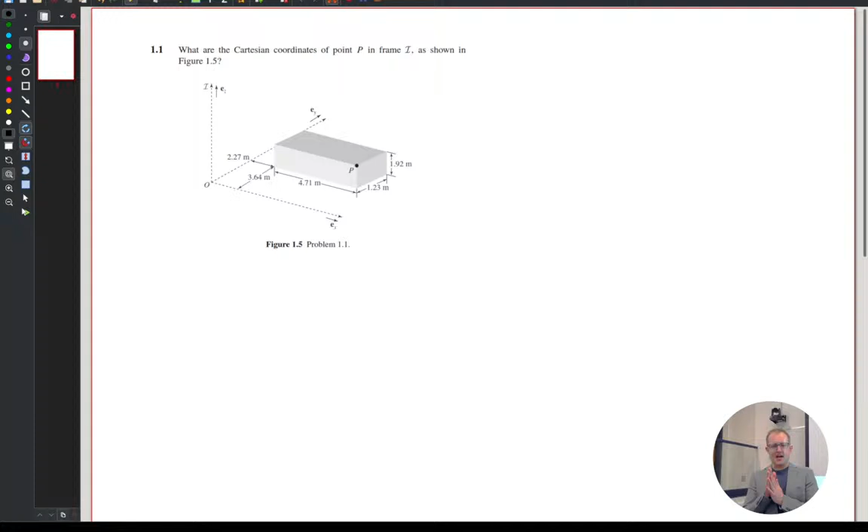All right, so we have this box, and then a reference frame, and we're trying to figure out where point P is on that box.

What kind of problem is this? Why are we looking at points on a box in a dynamics class? This doesn't seem very dynamic, right? It's just like locating a fixed position. What kind of problem is this?

I think it's just like a knowledge skill check, to make sure we know how to identify a point using Cartesian coordinates, because say you want to track something moving.

I don't know if you're going to track... you might track a certain point, but you're probably gonna be interested in the center of gravity, and you have to know where the center of gravity is. And then probably also moving parts of it, yeah.

Yeah, so motion and tracking and these kinds of things are all general kinematic sort of problems. So here, this is a kinematic problem. Right now we're looking at a fixed point in space, fixed point in time, but this could be a moving box, right? What if we were trying to track point P as the box is rotating and moving away? But either way, we still need that same kind of process.

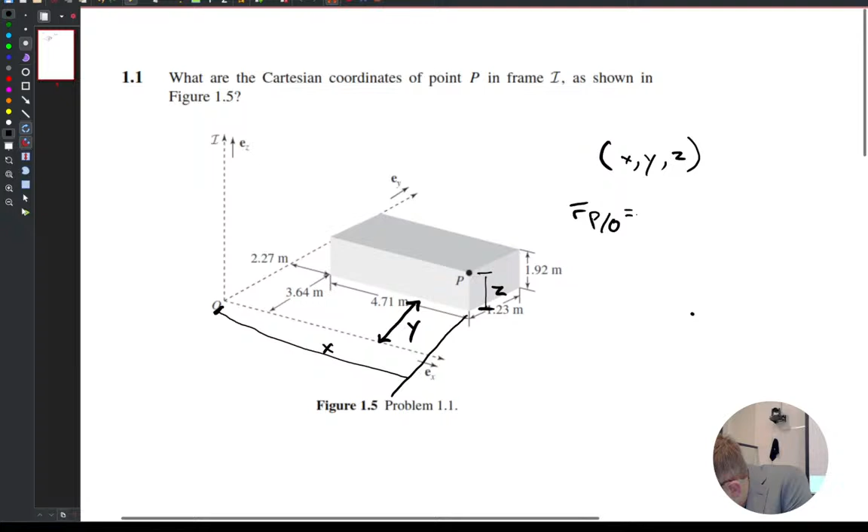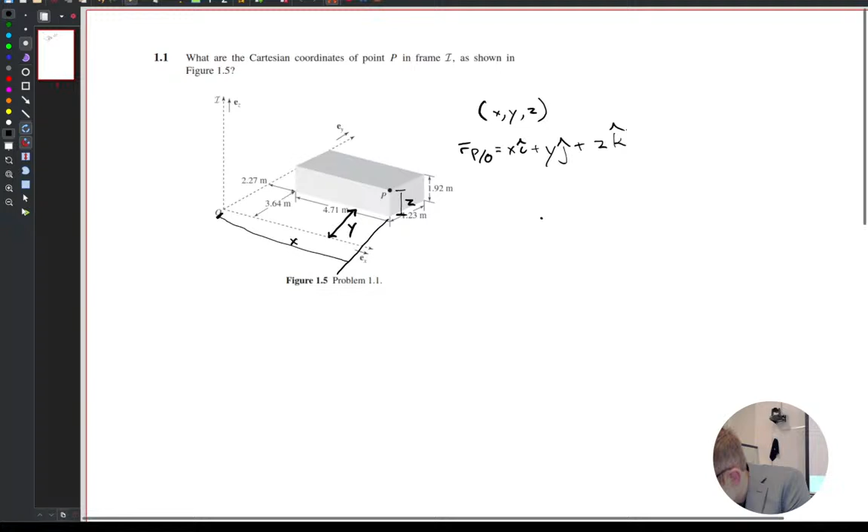I gotta zoom out a little. Kind of like that. Have you seen this one before? IJK. They're both technically the same.

The hard part is if you're always using parentheses like that, and you have two or three or four coordinate systems. So in general multi-body dynamic problems, every time you add a piece, the ground has a coordinate system, one moving part has another coordinate system, another has another coordinate system.

Like if you're using any kind of dynamic software, everything has a local coordinate system and there's a global one. So if you're doing something like this, I would note that this is X, Y, Z in that I frame - I'm measuring things in that little i, that coordinate system. That's the one thing that's a little hard about using this kind of notation, but technically it's still the same.

But like we were just talking, what if you wanted the unit vector in that? Because really, what we just did was describe this vector R P/O. And that unit vector, E P O, is X I plus Y... oops.

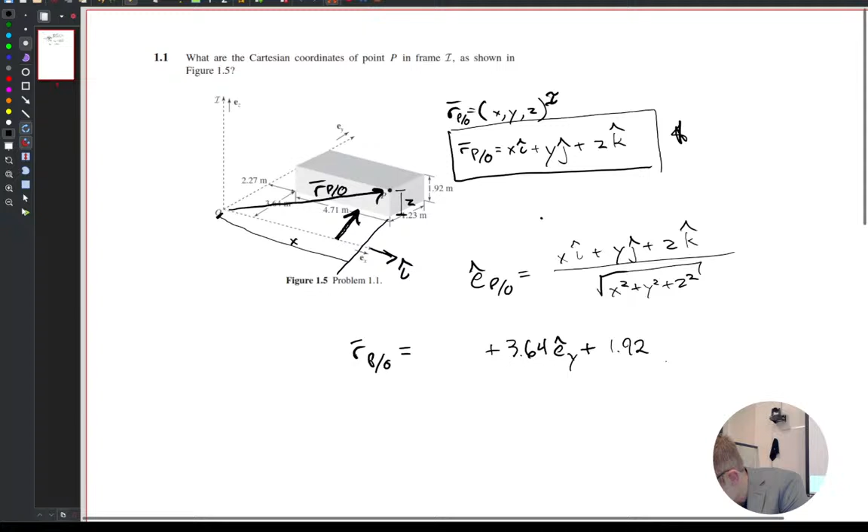Same thing, that Z is in the positive EZ component direction. We had 1.92, is that right? Kind of going up along that Z direction.

And then I wrote this, P/O. What is that, P/O? Why am I writing that? To P from O? Something like that, yeah. Some people, when I write that up, say no, that should be from P to O. Have you seen that notation? Okay good. People have sworn that in statics, if you have PO, that means you start at P and go to O. I'm like, no, it's always the destination with respect to origin.

So you're saying, how did I get to P with respect to starting at O? That's what we're saying—position, because that R is position here. Position of P with respect to O. We could do the opposite, like go from P to O, O/P. And if we already know P to O, we can just multiply by -1 and travel backwards.

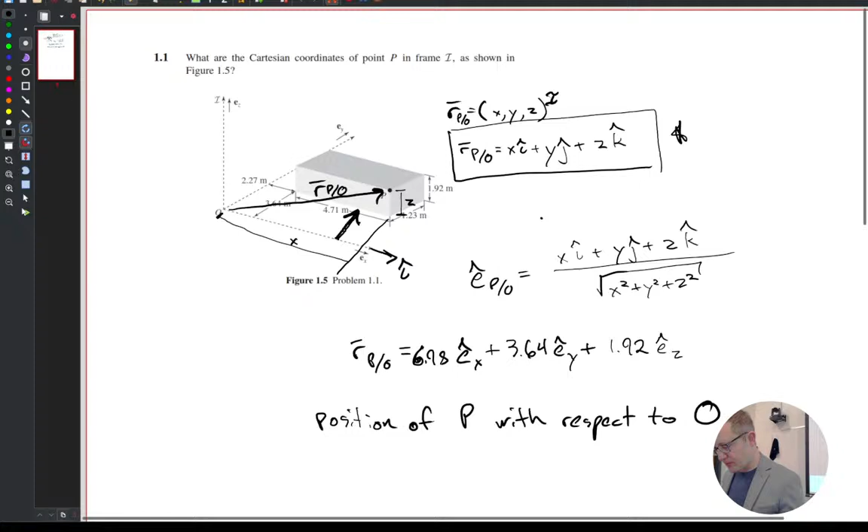Oh, you got 0.92? Oh no, I did the same thing—it's because the one is okay. Oh, it looks like, yeah, this is 1.9 and 2. But otherwise, if there was a 0.92, then it would be whatever height that box is.

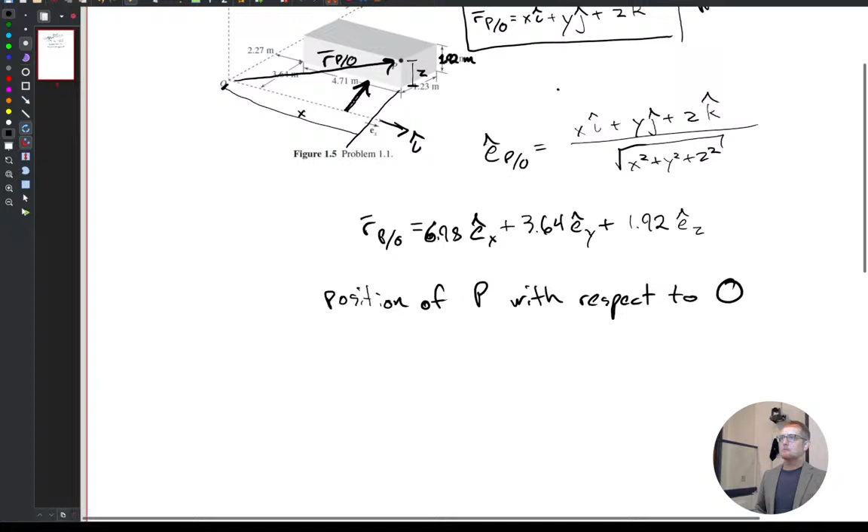Why put the... in this, I used EX, EY, and EZ because they're already written on my coordinate system—these are the directions of EX, EY, and EZ. EX is parallel to that 4.71 length.

But I could, like I put there, have an I pointing that way. I could have a J pointing up this way, and a K pointing that way, and replace them all because they're equal.

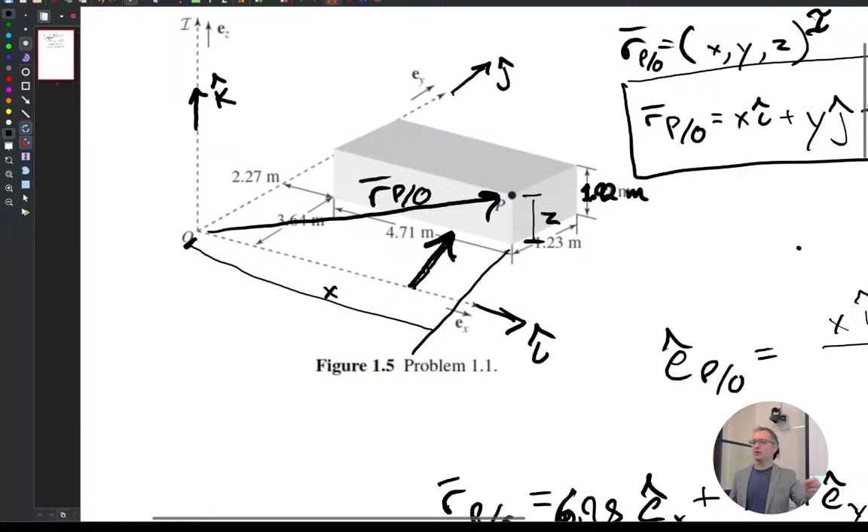What's the difference between a vector and a unit vector? A unit vector is in the same direction—unit vector is always magnitude of 1. So vectors in general are magnitude and direction, while unit vectors are just direction. So it's saying something like it's 10 degrees off of this angle, or it's parallel to this axis.

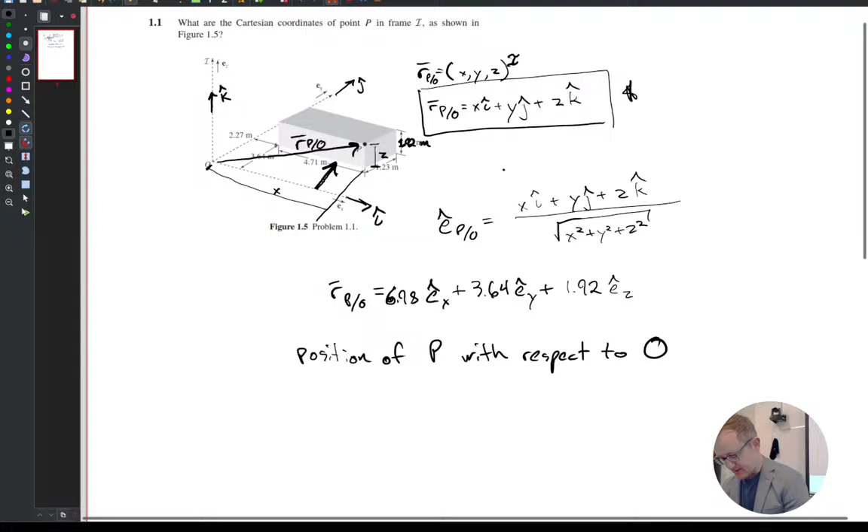Unit vectors, super helpful, especially as things start getting more confusing. Oh, 1.2, I want...

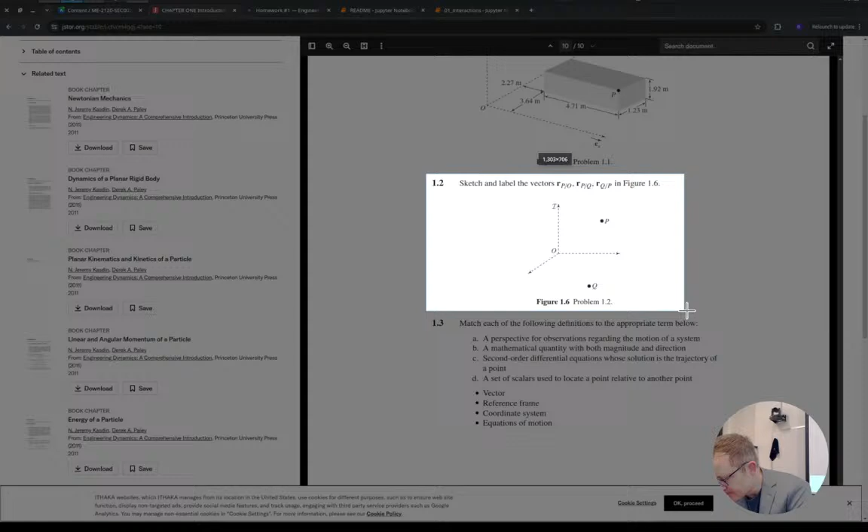All right, some more kinematic questions. We want RPO, RPQ, and RQP. So what are those—if we're just drawing arrows to represent those vectors, what does that look like in this diagram?

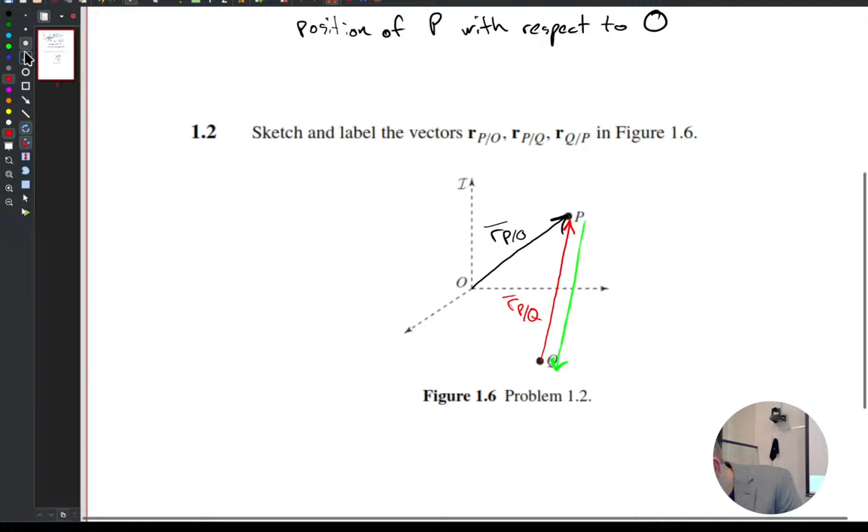And then we had the last one. If we're going Q with respect to P, then we have this one. Do we know anything about relations between these vectors, like RPQ and RQP? What are those? Negative one of negative the other—RQP is negative RPQ.

Oh my god, can't write today. What else? Do we know anything else about this? Just give it, sorry I'm slow. Can you just re-say when you have P over Q and Q over P, like which one you start and which one you go?

All right, so this is what I always do when reading this in my head—physicists and mathematicians love to shorten everything to the point where it's unreadable. So when you write R of P slash Q, you're saying position of point P with respect to Q. So every time I see P slash Q, or A slash B, I read it in my head as position of A with respect to B.

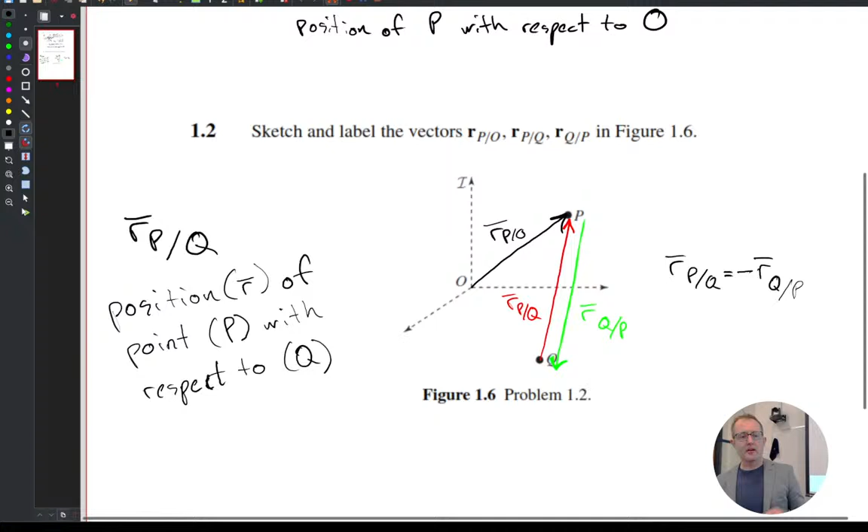So the R bar is just saying that. All right, let's do some quick notation. This is not a hard and fast definition, but it's generally agreed upon for this class. We'll use this notation a lot.

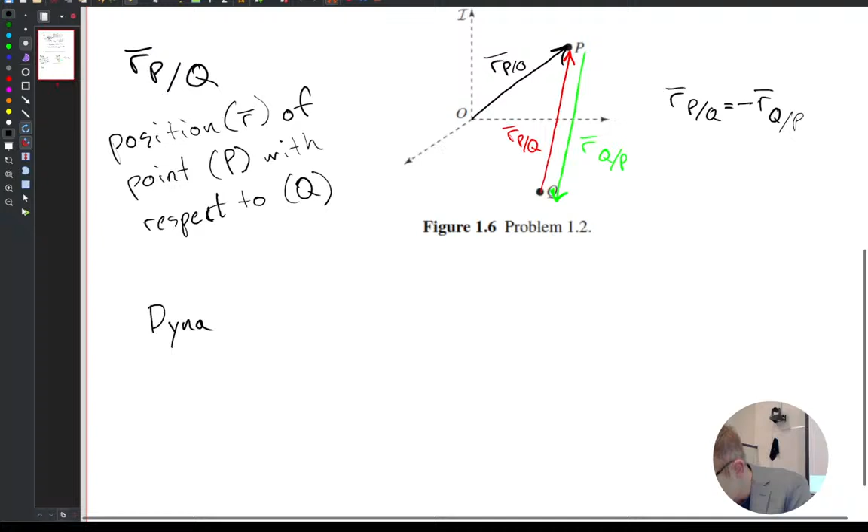Is it R bar or arrow? I use R bar—I've seen arrows too. It's easier for me to write LaTeX for bars rather than arrows on top. I just learned there are R bars and other classes for other things, so just want to make sure. Oh yeah, sometimes bar means average, right? Yeah, there's a couple different things. But in this textbook, bold or a bar means vector—bold things are vectors and bars are vectors. So, dynamics general notation.

R—so if it's R like this, it's a position vector. V, what do you think that one would be? Volume? No—velocity, yeah, velocity. Let me give myself a little more room.

R dot equals V. What am I saying there? The derivative of r with respect to time is velocity. So the shorthand notation for derivative with respect to time is that little dot. So r dot means d/dt of r equals v—the time derivative of position is v. These are general things we'll use a lot.

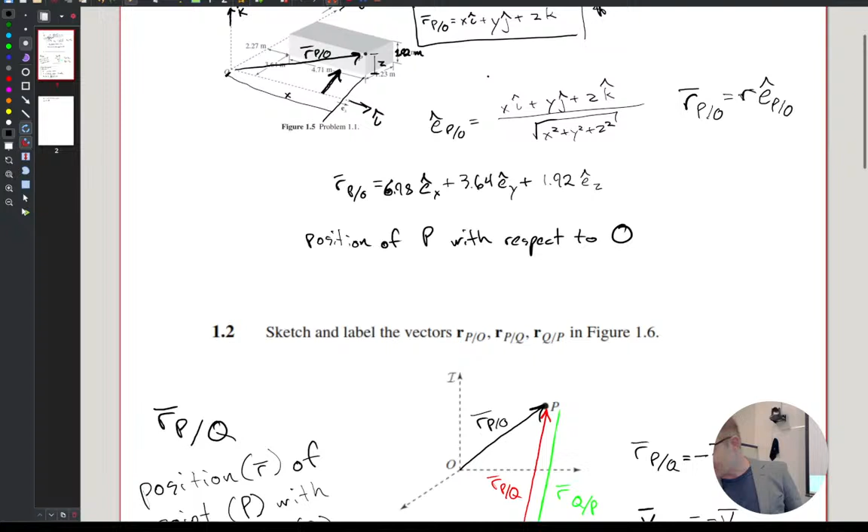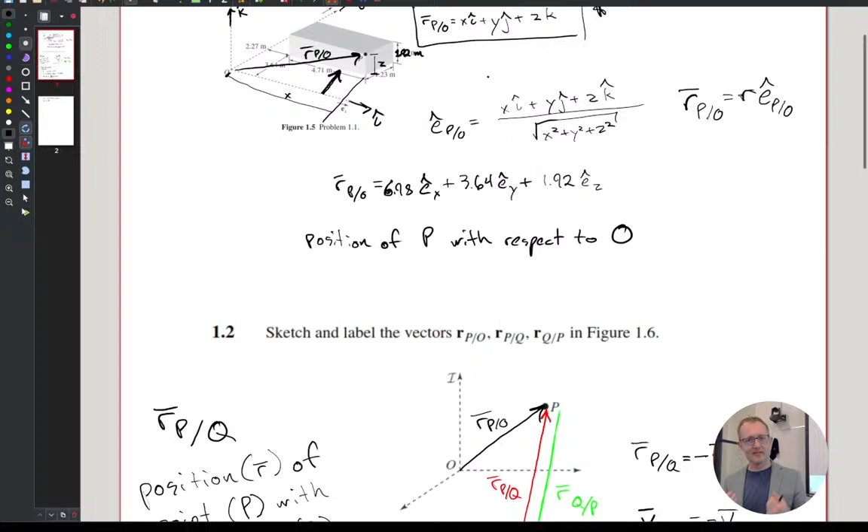And it gives me some insight into what it's like trying to deal with this stuff, because I've been doing this now... when did I go to undergrad? Oh wait, 22 years now. So this is becoming kind of like standard practice for me. It's hard to rewind back to the time when I first saw this. The first time I took dynamics, I got an A in the class, but I had no idea what I learned. I left and I was like, there was a determinant at some point and I wrote it, I got an answer, somehow I got credit for it. I was so lost. So my main goal has been, can we make this class more actually understandable? Because it's awesome, super important, very interesting, but you can get bogged down in a lot of these math details.

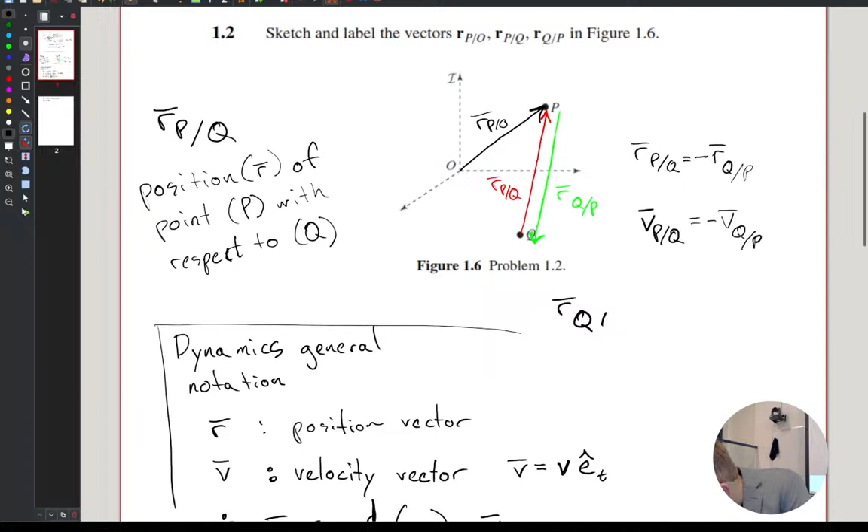Oh yeah, last thing I was wondering, do I know anything about R_QO? What is R_QO? We're not asked for this, but I was just... it goes from O to Q. Goes O to Q, yep. Be the sum of... R, and R2.

Summing something, so we get some sums in there. So yeah, it is, now we'll use orange. So I can do tip to tail addition, right? That it is R of Q slash P plus R of P slash O. I might be onto nothing here, but when you add them, the P's cancel, and you get Q over O. Then you get Q over O.

Yeah, and really that's all, we didn't make anything magic, we didn't discover new information. But there's a lot of times where we know how to get to P, we know how to get from P to Q, but we don't know how to get to Q directly. So having this helps out. It also helps for, like, if I know the velocity of P - so if I'm on a train moving, I know my own velocity, and then I watch something fly by, I know its relative velocity. If I want to know total velocity, then it's going to be mine plus whatever I saw. So it's also telling us the same kind of thing.

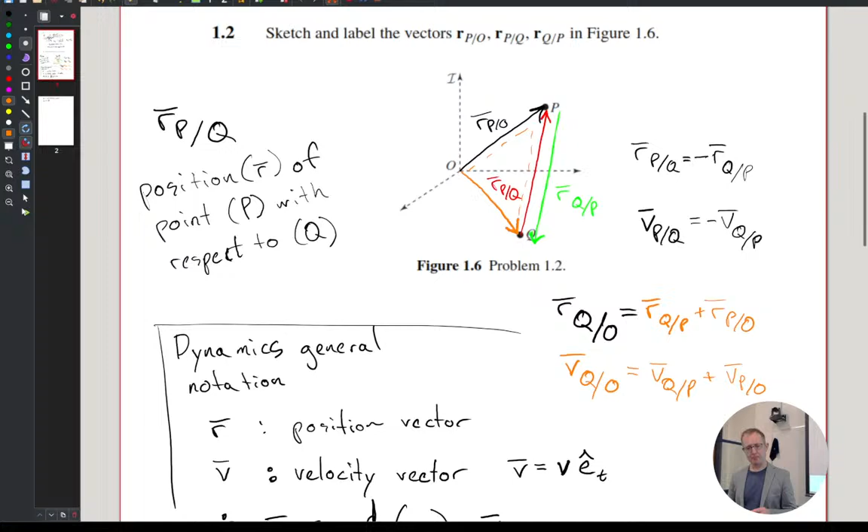But yeah, it does cancel out, and you end up with... and then for acceleration, we can use the same principle, all this extra stuff. And we're on to chapter 2.

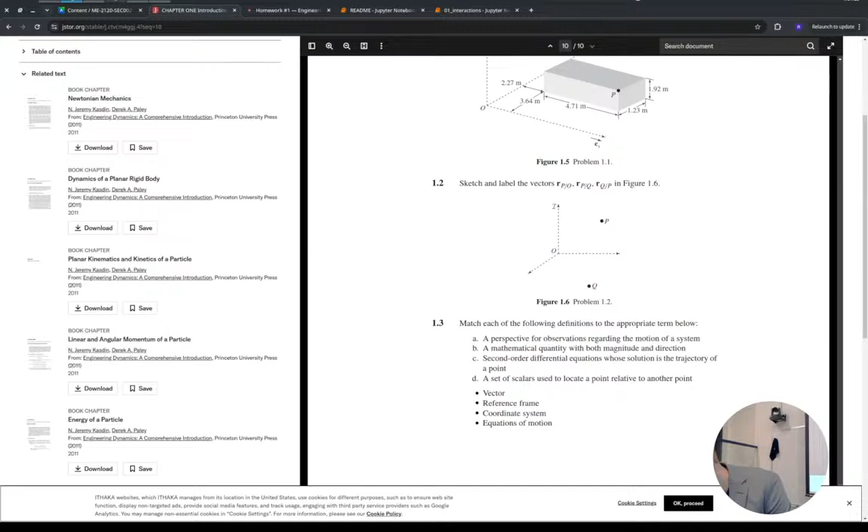All right, we need a free body diagram of the barbell. So as tempting as it is to draw a representation of that shirtless muscle guy, we're just considering the barbell, the thing that he's holding. That's just the eye candy for the problem. So we need a free body diagram of the barbell.

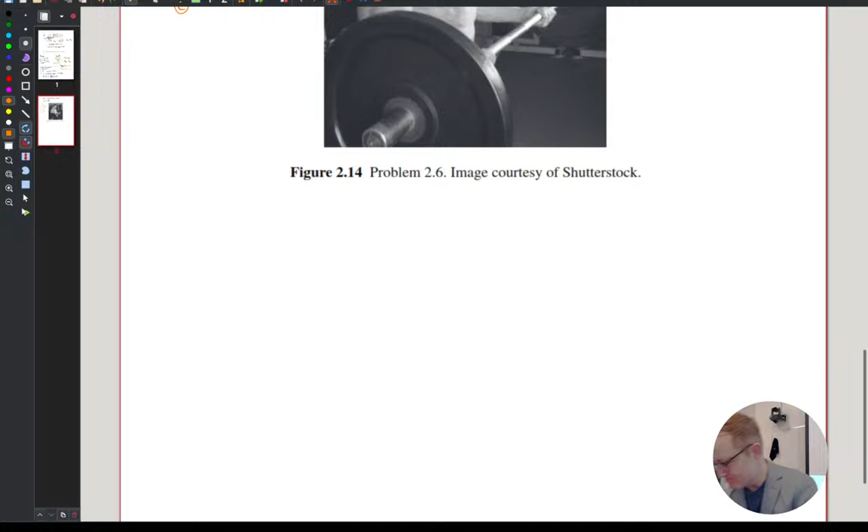Oh no, is it the weekend already? It's 9:55, is it time to go? All right, we got 2 minutes, right? All right, let's do it.

This was like the first level that I saw, of like there's weight and there's a force opposing weight, something like that. That was like the point mass assumption of just simplifying everything.

Can I show the other two things that I saw? You can call it norm because, whatever, everything's a normal. Do we want to have this conversation again? Okay, I guess we can write R1, and it doesn't matter.

So if we add the person plus that, then it's saying that whatever F2 the person is creating equals W. So the person is creating W on the bar.

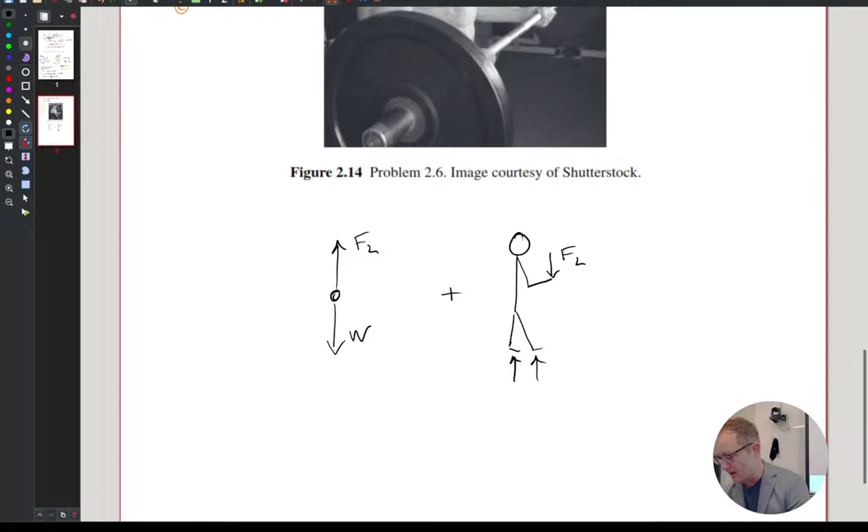The next one that I saw was kind of like weight 1, weight 2, kind of F1, F2, and then maybe even like W center, like a more involved kind of thing.

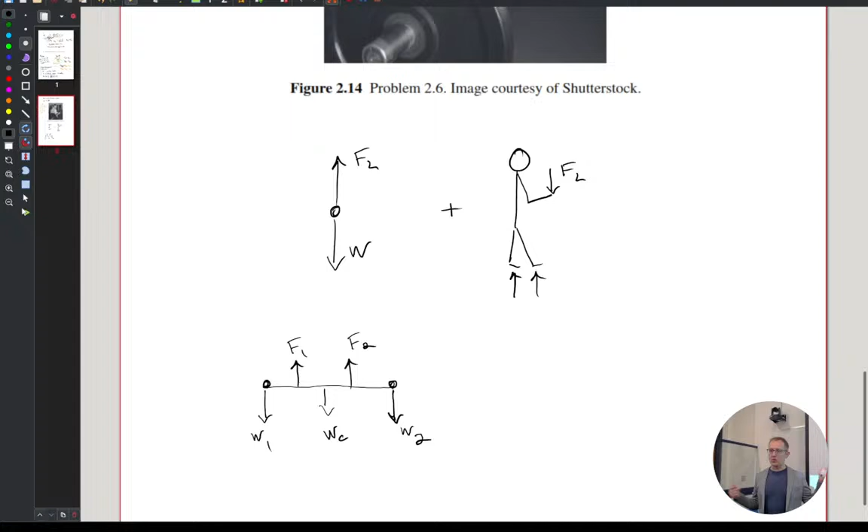Can you do one weight force just in the center? And you could say like all of them are combined into one, sum them all up, as long as you know that there's no torque being created from them. Or you could do something kind of in between the two.

Saying there's an F1, F2, and then a weight in the middle. So on Monday, you don't have to do anything more with this, but think about why you would use 1, 2, or 3. What is that helping you do? What kind of question would that answer?